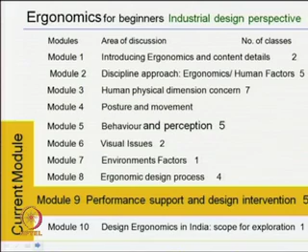So, among 10 modules, the current module is module number 9, Performance Support and Design Intervention. In this module, a total of 5 classes are there. Class number 35, Occupational Safety and Stress at Workplace in view to reduce the potential fatigue, errors, discomforts and unsafe acts.

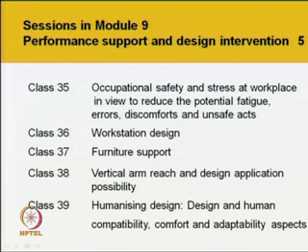Class 36, Workstation Design and Relevances. Class number 37, Furniture Support. Class number 38, the last class, Vertical Arm Reaches and Design Application Possibilities with workstation development in a craft sector was discussed. And the 39th session is today, the humanizing design, design and human compatibility, comfort and adaptability aspects. Here, that is today's session, the 39th session.

Humanizing design, design and human compatibility, comfort and adaptability aspects, where we are going to look into design intervention strategy, how we are making the strategy for development, whether it will be a small product or a system approach, who will be implementing this for sustainability of the total development, whether the responsibility lies on the users itself or the providers or manufacturers or the law enforcement. So, that type of strategy we will see here with a few examples.

This topic we are going to discuss under this heading, ergonomic design intervention strategy for work tools development. Reference: women agro-based workers in Northeast India. Within this, we will be discussing two specific aspects, that is the tea plucking and fruit processing industrial requirements. This presentation emphasizes the ergonomic design intervention towards context relevant work tool design development.

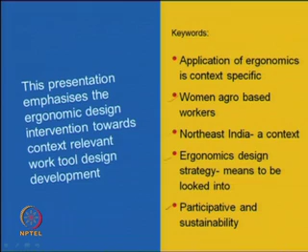The key words of this discussion go with: application of ergonomics is context specific, women agro-based workers, Northeast India as a context, ergonomics design strategy to be looked into, and participative and sustainability issues. With these key aspects, we are going to discuss the strategy requirement for design development, specifically for hand tools or work tools.

But the question arises on a development attempt; there are two types of development attempts possible. Number one is make and give. If the users find it good, they will use it. Means make the product, give it to them, put it in the market or give it to them to use. The second one is take the users in confidence, develop through participation what they need according to their need. Solutions thus arrived at will have a sustainable effect.

For a design development, a series of programs can be initiated on appropriate ergonomics design intervention for occupational and production well-being. Why do we require to develop a work tool? So that workers can perform the task well without any physical discomfort or any health problem, but the aim is to increase the productivity. So, the design development should aim at production as well as occupational well-being, health well-being, health safety well-being.

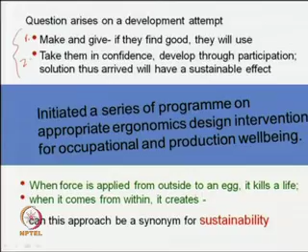Now, to make it sustainable, the issue comes with these two, what we discussed, make and give or take users in confidence. It can be said that when force is applied from outside to an egg, it kills a life. When the force comes from within, it creates. After hatching, when the egg breaks with the inner force, a life is created and it remains. But when an egg is broken by outside force, it kills a life. Can this approach be a synonym for sustainability?

If we always make the product and give it to them for using, it may not be sustainable. Who will continue this supply? If they can develop their own, modify their own, reuse the product the way people feel, it gives longevity to that product, it will sustain. Now, see what can be done.

The context is that a large portion of the women workforce of the northeast region of India is engaged in a range of upcoming agro-based, mostly private small scale units of food processing, as well as in tea leaf plucking in corporate sectors of tea industries. Tea leaf plucking is under the corporate sector and fruit processing is in private small scale units mostly. Appropriate strategy for work tool development has become a crucial issue in occupational wellness and productivity. How to handle it?

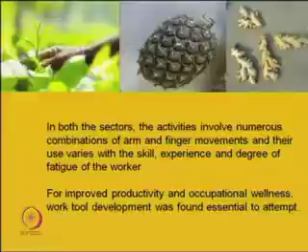In both the sectors, the activities involve numerous combinations of arm and finger movements, and their use varies with the skill, experience and degree of fatigue of the worker. The left hand top figure shows a typical tea leaf plucking, that is the apex part of the tea branch, the tea shoot, ideally 2 leaves and a bud to be plucked using nails or fingers, and this is the pineapple and the ginger. These 3 we are going to discuss.

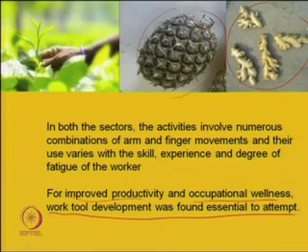The ergonomic risk of any work is posture. For that, they always have to bend to pluck the tea leaves: always a bending posture, carrying a load at the back, because after plucking they normally store it this way. So the load at the back is hung by a strap either from the head, the forehead, or the shoulder.

The posture, and the force in that position when they lean forward to reach the end part of a tree bush, the stretching and then the plucking like this. They do not always pluck two leaves and a bud, that system; they pluck some bigger leaves also, which require some force to snatch like this.

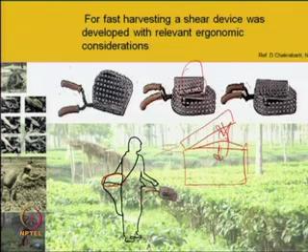Work tool design for quality and quantity production is necessary. For harvesting quality tea leaf, hand plucking is preferred and practiced still today. Mechanization is a constant search for development. In this case, shear harvesting does not match quantity and quality tea leaf harvesting; it only matches quantity, but quality harvesting is not there. So,

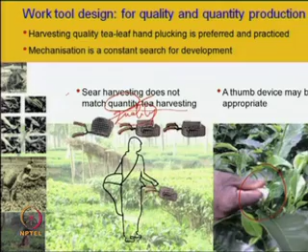the development strategy was taken to make a thimble type of device. This device can be put on a finger with a cutting edge here, so that with these shoots it can be simply put, and with less pressure and this cutting edge, it can be easily plucked. This development was done. This strategy was taken. Now, let us shift to the fruit processing industries, and what type of development they may require.

Fruit processing sectors employ women workforce as and when needed, but in tea it is a regular employment kind of thing. Among 4 thrust crops in the northeast, specifically in Assam, orange, cashew nuts, pineapple and ginger in the northeastern agro-horticulture belt have promising industrial feasibility in Assam. So, pineapple and ginger, these two items were selected for study.

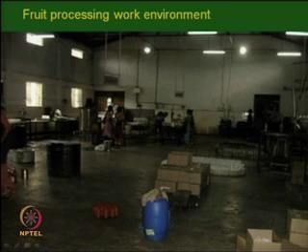The fruit processing work environment looks like this, where women and men work as and when required, and they engage in varieties of tasks. Here I am just showing one pineapple processing matter. In pineapple and pickle processing, two issues have come to the fore. One, mechanization or semi-mechanization, which one is necessary. Number two, for working hand tool development strategy, employee participation is necessary, because the pineapple season is a very short-lived season.

When the production is more, immediately you require more people to work on that. After the season goes, all that much workforce is not necessary. So, some of them get engaged with other fruit materials like ginger, etcetera. So, a specific product or hand tool development may not be used for all types of activities, but in the tea industry, when we develop a small product like a plucking device, it can be used throughout.

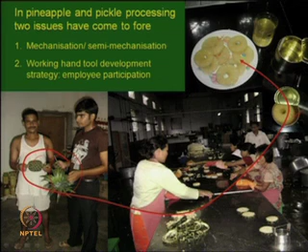So, here we can say that when the pineapple comes, it is like this, then it is trimmed and goes to the people. They first peel it, after peeling they slice it, and then the hard core inside is removed, and then it goes to tin for processing or packaging, and then to the end users. Now, the process is peeling, slicing, coring and packaging. There are two different systems.

In the first system, first make the slices and then peel it with a knife. After that, make the core with this type of device, like this. This is also another way of peeling, taking out the center one, and after that with a small coring device, with pressure, the center part can be removed, and then it can be used or stored.

Another system is to first peel the whole pineapple and then slice it, and after slicing do the coring. So, these types of knives are mostly used, and the coring, slicing and other special peeling devices after slicing are like this.

Concern comes: what type of device or hand tool can be developed? When in a field, after harvesting, when the pineapple needs to be sent to industry, or maybe to the city or a market somewhere else, at that time the front top bush area and the bottom strong stick area can be removed, or maybe some kind of peeling is possible, slicing is also possible, and it can be transported. So for that, a special type of development is necessary for the field requirement.

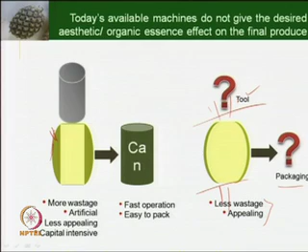So, if the pineapple is like this, first cut these two parts and then just peel only the sides, so that the whole retains its original shape. But for that, what tool is available, and after that packaging also. This gives less wastage and an appealing shape. So what would be the tool development for this? R&D trials in pineapple processing were made. The above brief confirms the specific need for study in the fruit processing and packaging industries, specifically for the pineapple industry in a rural setting, in reference to factors prevalent in the northeast.

A hand tool was developed like this. When you pull or push it, it increases to different sizes and matches the total shape of the pineapple. This concept of a pineapple peeler was developed by the mechanical engineering department at IIT Guwahati. Then a semi-mechanized version, a concept of a pineapple peeler and corer, was made at the ergonomics laboratory of the design department, IIT Guwahati.

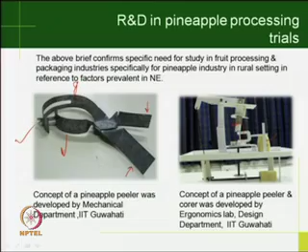Here a platform is given, a machine like this, where the cut pieces of pineapple are placed and then pressed through. It first peels with a rotating motion and then slices, and at the same time this portion makes a core. The pieces come out together and are stored on this side, and any juice is collected through a pipe. This concept is still at a premature development stage. Now its field trial is necessary.

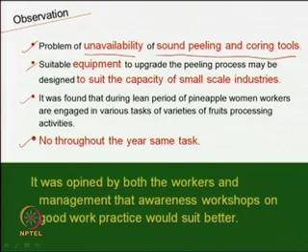With all these things, finally, what is the observation? The observation is that there is a problem of unavailability of sound peeling and coring tools. Suitable equipment to upgrade the peeling process may be designed to suit the capacity of small scale industries at this moment. It was found that during the lean period of pineapple, women workers are engaged in various fruit processing activities; the same task is not there throughout the year. Both workers and management opined that an awareness workshop on good work practice would suit better in this case.

Normally they use a small plate type of knife with a handle. Most normally some broken hacksaw or some blade is used with a special handle. They make it with some cloth cover or something like that, and they use it.

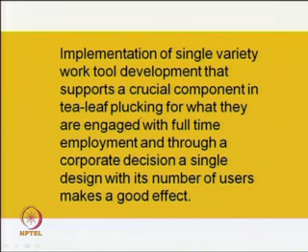Implementation of single variety work tool development supports a crucial component in tea leaf plucking, where they are engaged in full time employment, and through a corporate decision, a single design with its number of users makes a good effect. With the above basic requirement understanding, a series of projects may be initiated.

Exploring the design development possibilities for upgradation and revival of traditional practices by the justifiable use of new technologies, generating employment, and contemporary and sustainability relevance in design intervention are required, and we need to consider this for a sustainable development.

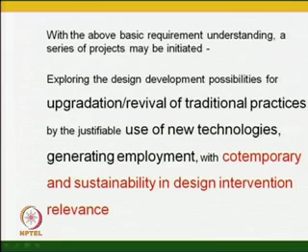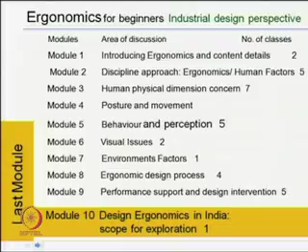So, with this we are concluding this 9th module, performance support and design intervention. Next, the last module of this ergonomics for beginners industrial design perspective, module number 10, design ergonomics in India, scope for exploration, we will discuss next day.